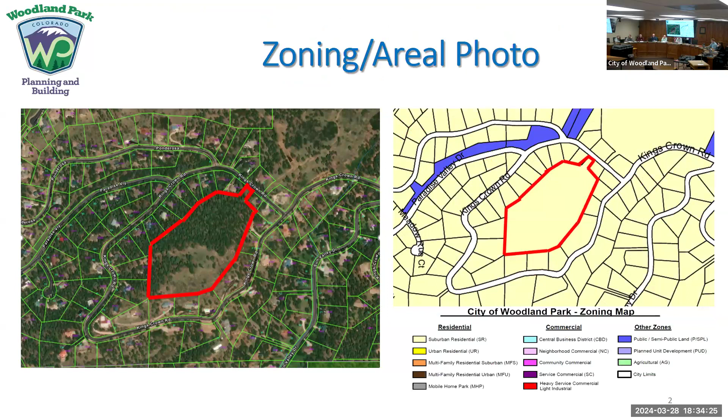The subject property is located within the Top of Paradise Master Plan and is accessed off of Kings Crown Road. The property is zoned suburban residential, as seen here on the slide, as the subject property is located within the Top of Paradise Master Plan.

In 2005, the City Council approved the amended Top of Paradise Master Plan, which encompassed 197.7 acres, showing 175 lots and allowing up to a total of 190 lots within the SR zone district.

The left-hand side of the slide is a snapshot of the master plan, which encompasses several subdivisions, including Forest Edge Park 4th Edition, Forest Edge Park first filing, Thunderbird Estates, and Paradise Estates filings 1, 2, 3, 8, 9, and 10, and Haven at Paradise.

On the right-hand side of the slide is the subject property and how it was planned in 2005. It was originally planned for 8 residential lots, but has never officially been platted.

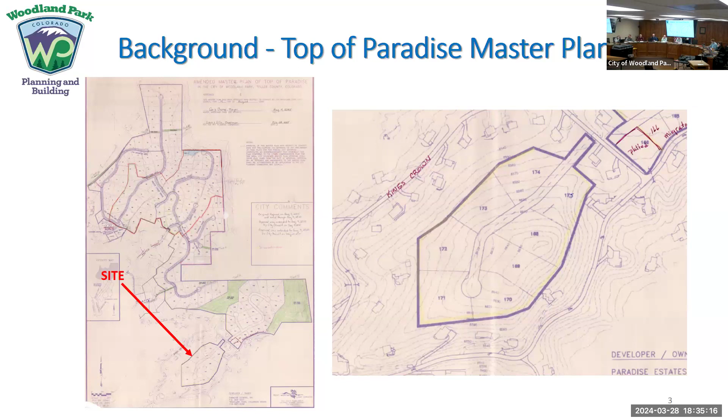As a reminder, in regards to process, in order to construct a building on a property within the City of Woodland Park, the parcel must be a part of an official subdivision. The subject property was never part of an official subdivision, and this is what the applicant is trying to achieve.

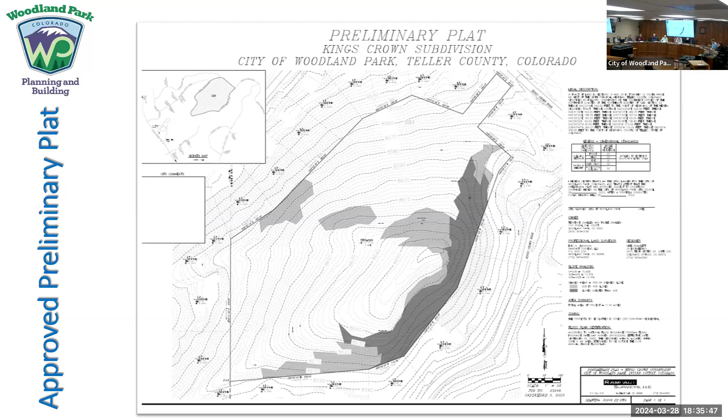The first step of that process is a preliminary plat, and that's what you see here on this slide. The City Council approved the preliminary plat on January 4th of this year.

As stated, the applicants are requesting final plat approval for a one-lot subdivision. This slide is the final plat exhibit, which outlines the property lines of the one-lot subdivision labeled Kings Crown Subdivision.

Staff reviewed section 17.20 of the municipal code, which outlines the requirements for final plat. All provisions on this slide comply, and a full analysis was included within your staff report.

Consistent with the requirement of city code, the Parks and Recreation Advisory Board reviewed the proposed final plat at their February 7th, 2024 PRAB meeting, and they unanimously approved the Kings Crown final plat with no recommended conditions.

The application was referred to all parties listed on the slide. The application and this hearing was noticed within the Pikes Peak Courier, and all abutting landowners within 150 feet were also mailed a letter. Staff only received one comment throughout this process, from the City of Woodland Park Utilities Department, stating they approve of this final plat.

Staff's recommendation is that Planning Commission recommend to City Council approval of the Kings Crown final plat to plat 11.3 acres into one lot. This concludes my presentation.

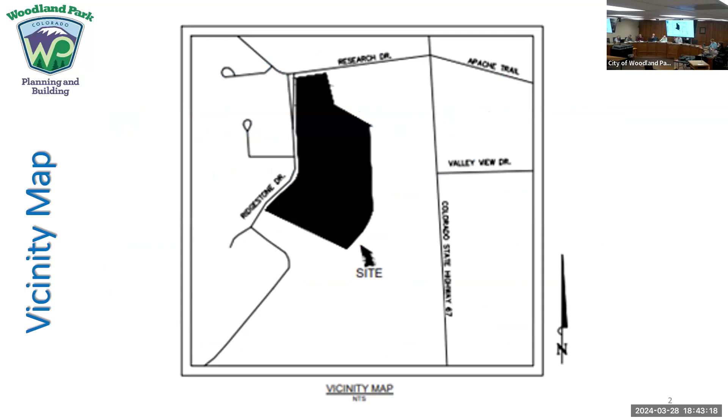Thank you, Chair. Again, this is a request for approval of a 2-year extension of the approved Pines at Tamarac portion of the Stone Ridge Village Planned Unit Development and a 1-year extension of the approved Pines at Tamarac preliminary plat. The subject property is located southeast of Ridgestone Drive and Research Drive, as seen here on the vicinity map. The original preliminary plat for this development, Pines at Tamarac, was originally approved with uses allowed for a total of 77 dwelling units, with 58 apartment units and 19 patio homes. In 2022, the applicant applied for a PUD amendment to allow for townhomes instead of apartments.

It was an integrated design with 20 patio homes and 49 townhouses intermixed, 2 entrances from Ridgestone Drive, and an internal road that loops through the property. The open space was changed from a linear strip on the perimeter of each tract to a larger central area with several smaller areas and trail connections.

Lot sizes for patio homes are a minimum of 3,581 square feet, with the average being 4,672 square feet. Townhomes have a minimum lot size of 1,862 square feet with an average of 2,452 square feet. The anticipated building footprints are 2,185 square feet for patio homes and 1,287 square feet for townhomes.

This application was approved by Planning Commission on April 14th of 2022. And on this slide here is the approved final development plan.

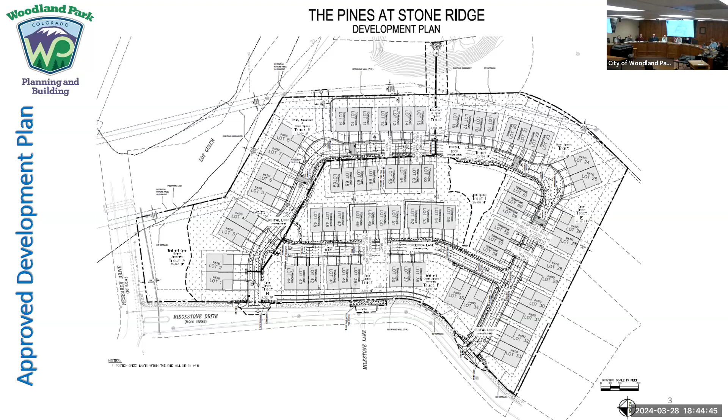The current request from the applicant is to have a 2-year extension of the approved PUD master plan and a 1-year extension of the approved preliminary plat. I would also like to mention that on January 16th of this year, 2024, the City of Woodland Park Planning Department issued a grading and infrastructure zoning development permit for the subject property. While a permit to begin grading and installation of the infrastructure has been issued, construction has yet to commence.

The application was referred to all parties here on the slide, and staff received no public comments.

If the Planning Commission finds that the extension is warranted, they may recommend that City Council grant the 2-year extension of the planned unit development and the 1-year extension of the preliminary plat, with the note that the approving resolution should clearly state that the development is still subject to all conditions and dimensional standards specified within the original approval. This concludes my presentation here tonight, and we also have Craig O'Boyle on Zoom, if you guys have any questions for him.

Initially, does anyone in the Planning Commission have questions? I do.

In doing the research and looking at the municipal code for planned unit development, the code is very clear on a limit of 2 dwelling units per acre. This is approximately 7.5 dwelling units per acre. Furthermore, the code gives some very clear situations where the Planning Commission can recommend dimensional standards, but it seems clear to me that it does not provide us the latitude to exceed the 2 dwelling units per acre. So, as my understanding, this is not compliant with a planned unit development, but it seems to fit perfectly within a multifamily residential suburban designation. So that would seem to be the appropriate zoning for the desired use of this property.

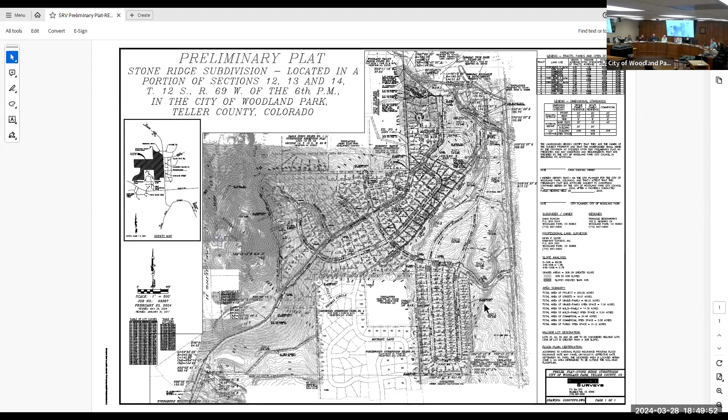Just as a note, when we approved the amendment to the PUD, the density in this particular area did go down, with taking away the apartments and putting in the townhomes. It's also going the other way—it's less dense.

Do we have the guest representing them that could join us on Zoom? I'd like to ask a question. Mr. O'Boyle. Okay, are there other questions for the staff? Is the applicant available to speak via Zoom?

Yes, I'm getting there. Hang on, Craig, I'm sorry. Mr. O'Boyle, I think we accidentally muted you. If you just want to unmute and speak, please do so. There you go. This is Craig O'Boyle.

Hello, good evening, we can hear you. Okay, thanks Karen. I'm sorry I couldn't be there—I actually just got off an airplane from a family spring break trip. Very good.

I'm just curious what's the status of your construction project. You said you pulled a grading permit and are attempting to get underway. So we've gone through, I think, three submissions to get to this point. As CJ said, our final submission was approved, I think, January of this year. It's been a two-year process to get to where we were able to now get the permit.

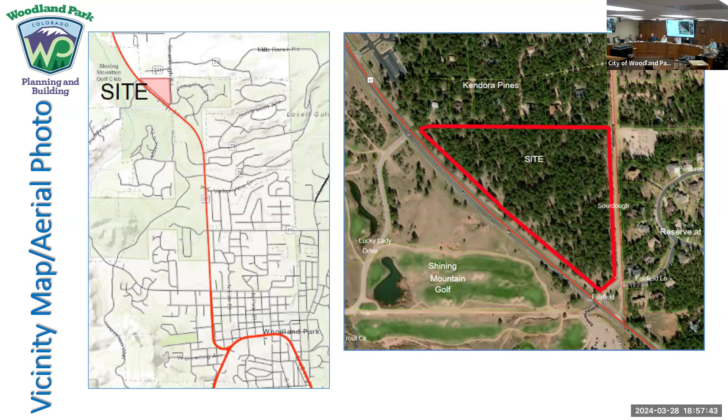In 1999, the northern triangle, now Lot 1, was rezoned from PUD to suburban residential. In 2000, the Dayspring Christian Fellowship subdivision was approved, consisting of the subject property and the northern Lot 1. In 2002, construction began on Lot 1, which is now the Impact Church. Construction never commenced on Lot 2, the subject property.

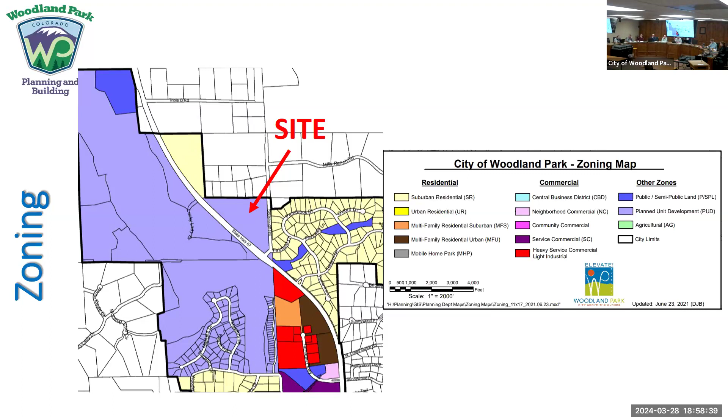In 2019, the Pines at Tamarac Planned Unit Development Final Master Plan and Preliminary Plat, shown on the right-hand side of the slide, was approved by City Council. This master plan consisted of 26 single-family lots and 5.05 acres of open space. The applicant then gained extensions of the approved preliminary plat and PUD in 2021 and 2023. As a reminder, by city code, preliminary plats can only be extended one year at a time, while PUD master plans can be extended two years at a time. That's why the master plan expires in 2025 and the preliminary plat expires this year, 2024.

On the next few slides we have some site photos, just to get you familiar with the site. This is the subject property. Highway 67 is on the west side here. Fairfield Lane is on the south side, facing the town of Woodland Park. On the east side here is Sourdough Road.

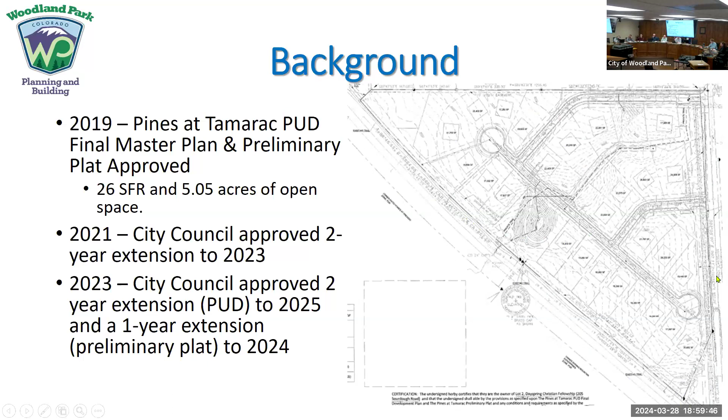CJ, is that bike path part of this property or is that city property? That's actually within CDOT right of way. Okay. And that's the Centennial Trail, I believe. Centennial, yep.

On this slide, we wanted to show a side-by-side comparison of the previously approved master plan, on the left-hand side, and the proposed master plan on the right-hand side. As you can see, the overall layout of the development is the same, with the general lot configuration and two access points off of Sourdough Road.

On the right-hand side, the proposal consists of two different construction phases. The applicant has expressed their intention to build out phase one and have construction done as soon as possible, with the goal for phase two to finish construction sometime in 2026. Another difference between the approved and proposed master plan is the increase in density from 26 dwelling units to 39 dwelling units, which decreases the individual lot sizes. Lastly, there is the open space that is being proposed.

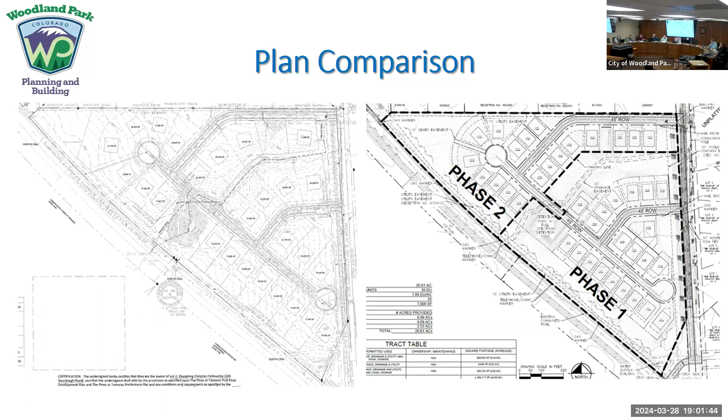Currently, the approved PUD master plan and preliminary plat for the Pines at Tamarac consists of a total of 5.05 acres of open space. The proposal at hand includes an increase of open space for a total of 9.09 acres on the 20-acre site. Here on the screen is an outline of how that 9.09 acres is achieved, with a total of 3 open space tracts.

The table on this slide is another representation of what is currently approved versus what is being proposed. Highlighted in yellow are the proposed changes, which include the number of units from 26 to 39, the gross density from the approved 1.26 dwelling units per acre to a total of 1.89 units per acre, and lastly, the minimum lot size from 16,000 square feet to 7,800 square feet. On the bottom of this table is the total acreage of each use of the master plan, which includes the housing portion, open space, and right-of-ways. All 3 are being proposed to change.

Pursuant to the traffic study recommendation, the applicant proposes to install a 320-foot long plus a 180-foot taper northbound right turn deceleration lane on Highway 67, which is outlined in blue here on the screen. As you can see from the CDOT comments, which are in front of all the planning commissioners here tonight, CDOT did submit these comments after the packet went out to you also. That's why you guys have it in front of you tonight. This deceleration lane is a requirement from CDOT.

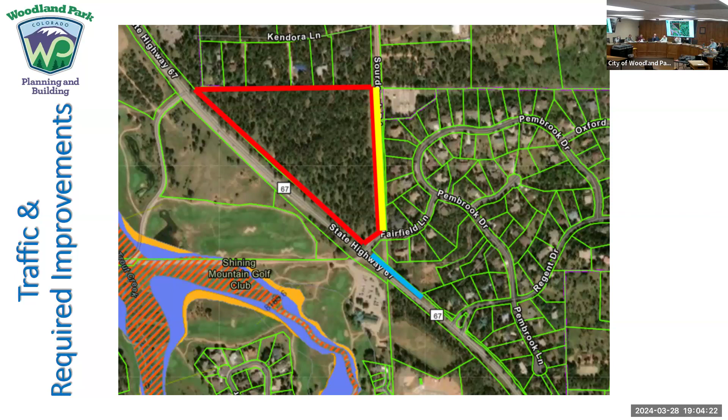Staff analyzed section 18.30 of the city code, which provides requirements for PUD zone districts. Staff found that the application substantially complies with the sections listed here on the screen. Also, a full analysis was included within your staff report.

Lastly, on the PUD amendment analysis was dimensional standards. All development standards are included within the proposed development final plan. The table here on this slide compares the current proposed amendment to the previous approved final development plan, as well as the more typical suburban residential zone district standards. We are looking at the SR zone district because one of the standards within the development dimensional standards is that the development must be in harmony with the surrounding area. As you remember from the aerial photo in the beginning of the presentation, just to the east of the subject property is the Reserve at Tamarac subdivision, which is zoned SR and is also within city limits.

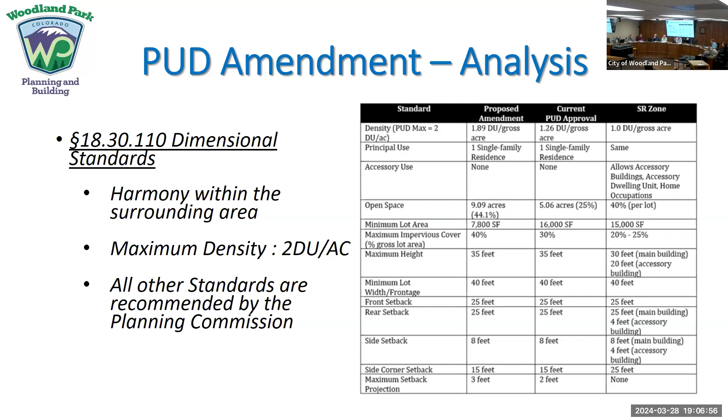Staff also reviewed section 17, which provides requirements for preliminary plats. The application complies with the standards listed here on the screen. And lastly, within the preliminary plat section of the code, it outlines design standards. Staff found that the application substantially complies with the sections listed here on the screen. Again, a full analysis was included within your staff report.

Staff referred the application to the agencies listed here on this slide. Staff did not receive any official written public comments, but did field some questions in our planning office from citizens stopping by.

So for the recommendation, staff has a few recommendations for you guys tonight. The first recommendation is related to the PUD amendment portion of the application.

The recommendation is approval based on the findings in the staff report and as presented at public hearing of the request by David Garrettson, the applicant, and the Pines at Tamarac LLC, the property owner, for PUD 2024-03, planned unit development, final development plan for 39 single-family residential lots on 20.61 acres on Lot 2, Dayspring Christian Fellowship, with the address of 205 Sourdough Road in the PUD zone. The Planning Commission recommends that City Council approve the dimensional standards as shown in PUD 2024-03, planned unit development, final development plan for 39 single-family residential lots on 20.61 acres on Lot 2, Dayspring Christian Fellowship in the PUD zone.

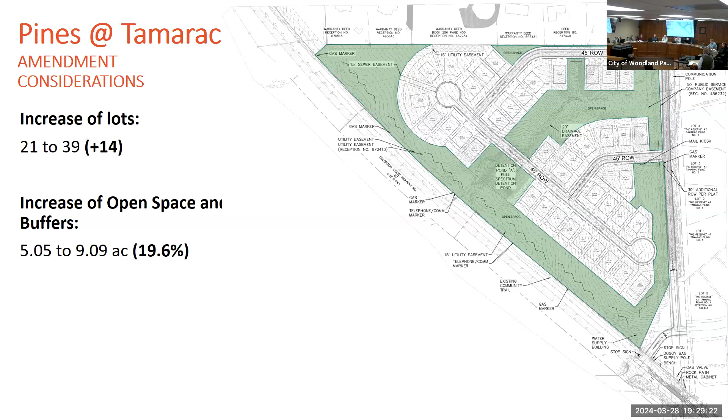Again, no real changes from an infrastructure standpoint on the property. As mentioned, the focus has really been on reducing the footprint on the property itself, preserving more of the trees.

The open space is really supposed to be more of a passive open space. We are not asking the Parks Department to take on open space or public amenities within the property. We have been talking with them about connections through the drainage, that natural drainage area, looking at a trail connection from Sourdough down to the Centennial Trail. Right now, there's no real public trail infrastructure on Sourdough or in the neighborhood to the east. So the value may still be primarily focused on these residents as a whole. But we are having that conversation, and as mentioned, that would be finalized as we move forward with final plat.

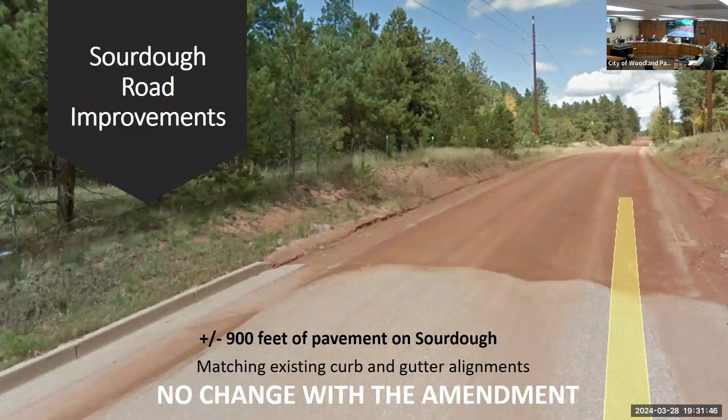Next slide. The other thing talked about was the Sourdough improvements. Again, that's nothing new to this amendment. It's been embraced as part of the change, part of the improvements required with the property. This picture represents the unimproved areas of Sourdough and then the existing curb and gutter and pavement that's there. So that will continue up through the property. I'm sure that will improve the condition of Sourdough's access up to the county line. Next slide.

As mentioned, CDOT is always kind of late to the game providing comments, but we are engaging with them on the conversations. There's nothing really there that surprises us based on what we've already gone through with the original PUD amendment and preliminary plat. We will continue that conversation to move forward and get a new access permit approved. Nothing there seems to be a challenge, and our goal would be to have those answers cleaned up and tightened up before city council.

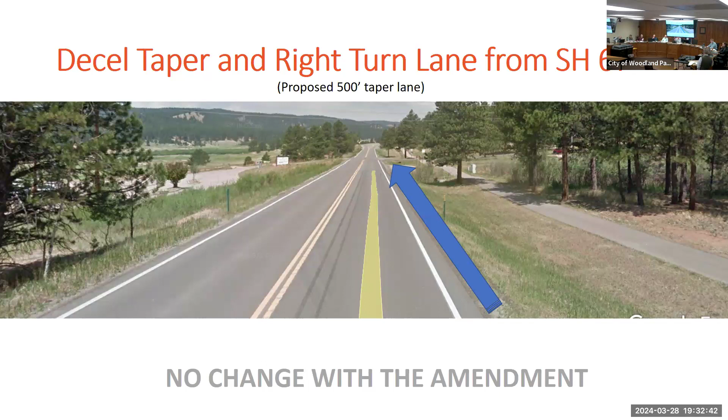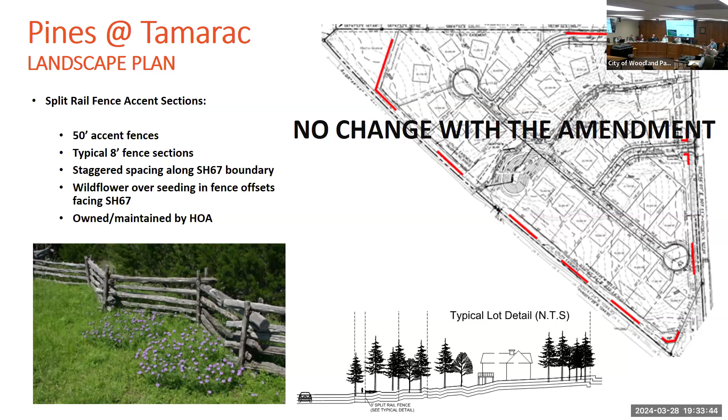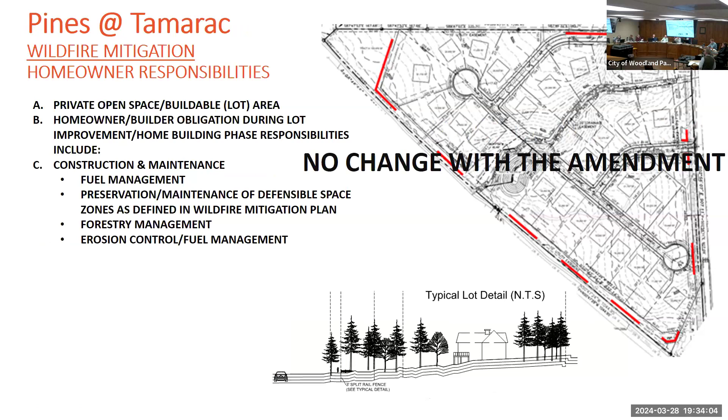Mitigation is also a big concern. We heard that last time. We've worked through that with our forestry people, and I know that's been reviewed by the fire department. We're maintaining status quo as far as the intent of the PUD and the management of that open space.

Again, no real changes. We're looking at a mixture of materials architecturally, beginning to develop discussions around what the covenants want to be and need to be, both in terms of how we're maintaining the roads and open space, but also how we're addressing opportunities with architecture.

I bring it back to this picture, just to give us a view of the open space. We wanted to highlight the buffers separating us from the highway and from the residents to the east. It doesn't look a whole lot different, but there are definitely some dimensional differences as mentioned. We're happy to talk more in detail about any specifics there, and happy to jump into more conversation about that with you.

As Karen might have already referred to, the same process we took to identify lot coverage, open space coverage, and such ratios is what was carried through from the original process. So we didn't veer from that. We used the same mathematical equation, so to speak, to get our percentages.

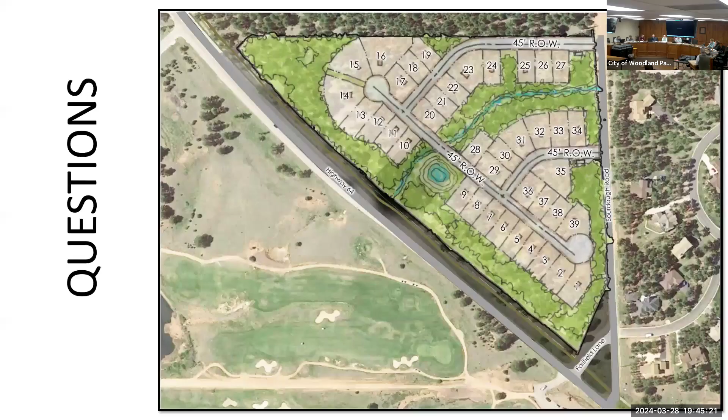Staff, something useful in that? I'm not a utility expert, so I really don't know, but we've got this many units, and it's ordinarily on a looped water line. And for your point, Mr. Hoyt, this is what you had in your presentation. Do you want to hit on that at all?

I can read the comment verbatim if that helps you guys at all, from our utilities director. But it's up to you guys.

That's helpful, sure. Okay, well, while CJ's pulling that up, Mr. Hoyt, if you could do just kind of a quick overview of that slide as soon as we get it back, since you had it color coded with the utilities. Is it not showing on your side of the screen?

It is there. Okay, but the water connects here and moves up to Sourdough. I wasn't sure about the piece across the highway that popped up. Right, so on that slide that was just up, the blue represents water lines. Correct.

And so the official comment from the utilities department was: the water line will need to be looped. City engineering specifications only allow 12 units on a dead end line. This project is already on a dead end line. Looping the water main across the highway will need to be discussed. So that was the comment from our utilities director.

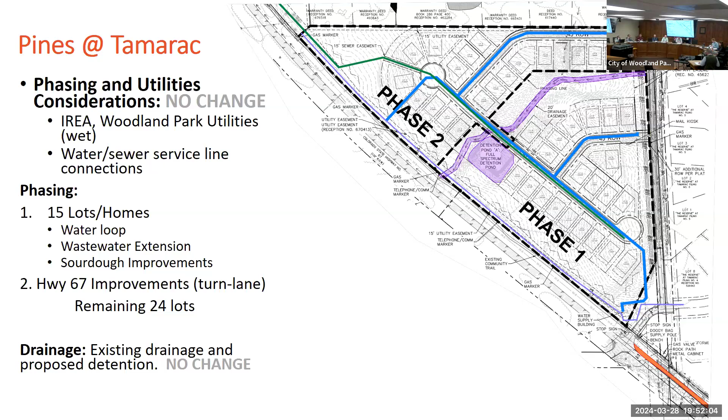Okay, all right, just a small item—what's the significance of increasing the setback projection from 2 feet to 3 feet? I'm sorry, what item are you talking about? In the table which TJ presented. But what category were you talking about? The bottom, the very bottom of that table. Oh, for the buildings? That was just a decision to be made on some architectural options.

Okay, because there's not a lot of difference between 2 feet and 3 feet if it's on the front and back. If it's on the side, I don't know—my own personal reaction is that you've got an 8-foot setback on the side, and 3 feet starts to narrow the projection quite a bit.

From an architectural standpoint, I want him to have that reaction too. I'm just wanting a small item—from an architectural standpoint, that extra foot makes a big difference in passive solar and some of the energy savings as well, just cutting the sun angles coming into windows during certain times of the year. On side setbacks it would probably be less significant, since the houses are so close together, there's not a lot of solar coming between the houses.

Yeah, I would have thought. All right, and enough—again, just go back to Mr. Kenning's comment too, was we've identified setbacks, the buildings have to fit within inside of. We think the building envelope that we've provided gives the architect or the property owners enough options to push and pull within that space to create some options and variations in the building. So we don't know exactly how close or how far or where they'll actually sit along there yet, but we think there's a building envelope that'll serve well.

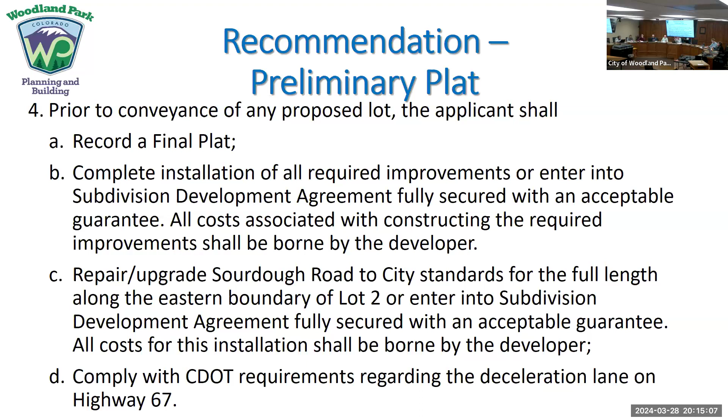Could you expound on number 5 in that list of conditions? The covenants, section. As far as the covenants are concerned, the city does require with the final plat that the developer submit the covenants to the city for review. And so that's the architectural requirements and other restrictions for that homeowners association, basically.

Correct. And then as far as park development fees, in the applicable amount, like we kind of alluded to before, once they apply for the final plat, it will get routed to the PRAB. PRAB will take a look at it and give you guys a recommendation as far as fees in lieu and trails, all that. Those will all be part of the final plat hearing, right? Correct. And that's also a public hearing, so you guys will definitely see the final plat application when it does come.

My sense is that there's some incipient disagreements here about phasing, and the subdivision agreement may be the source of some negotiations to be necessary here. I guess it's clear I have my concerns about this. As far as technical objections, one is I don't like the fact that we can't say how much is open space in accordance with the ordinance.

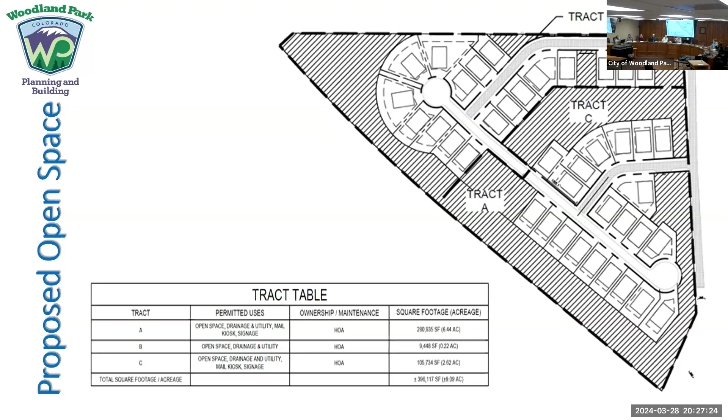Let me ask the staff, is it proper for the commission to consider the consistency of this project with general welfare of the community, harmony with the neighborhood, and similar factors? I'm sorry, I'm distracted by another conversation. So you're asking about considering what again, sir?

The general welfare of the community, harmony of this with the neighborhood, or other subjective factors. If it technically complies, if they come back and show that it is 15%, I think the language clearly says we can judge the quality of the open space. Is there other places? Are we entitled in other areas with respect to the layout of the planned layout as a whole? Use our judgment, is this good for the community? Is it desirable for the neighborhood?